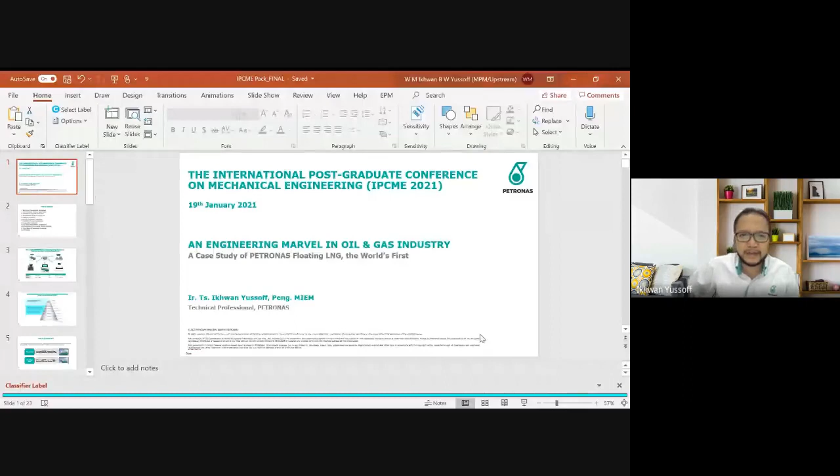Thank you very much, Dr. Hafizi, for a very lengthy introduction. I just would like to check, can you see the slide now?

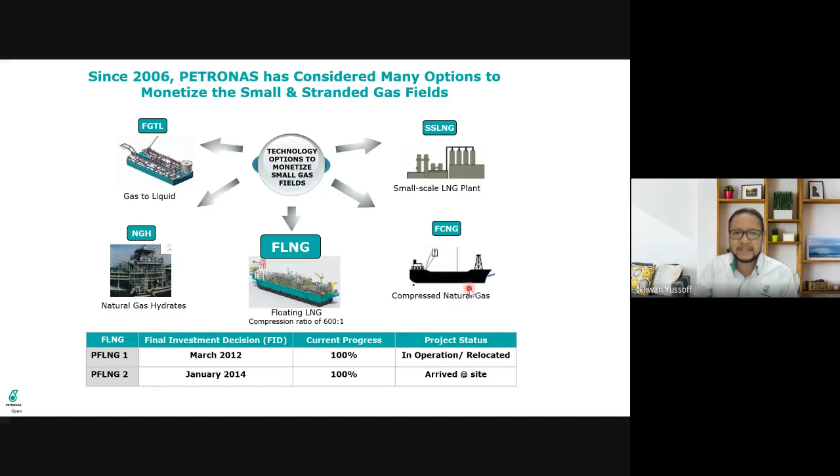From that development option, we have studied various options. For example, we have looked at small-scale LNG plant, floating gas to liquids, natural gas hydrates, as well as floating CNG, compressed natural gas. Don't worry, I will go into more detail later on what is meant by CNG and GTL.

So as a business opportunity in general, we are looking at a certain field size for us to make use of this facility in extracting the reserve underneath the earth, for example, on how we extract the gas out of the earth.

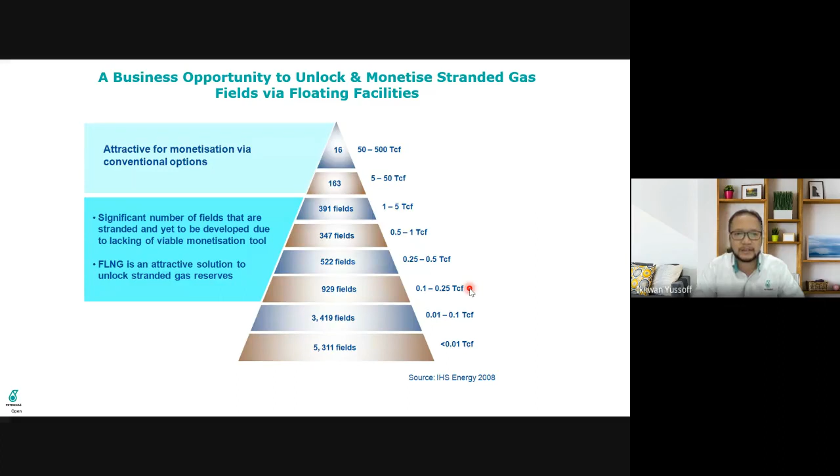Okay, so again, let me define what is stranded. By definition, stranded means the resource which may be too remote or far from the market of natural gas, where construction of pipeline is a bit expensive due to the fact that you have a very bad condition for seabed as well as water depth, which is very deep.

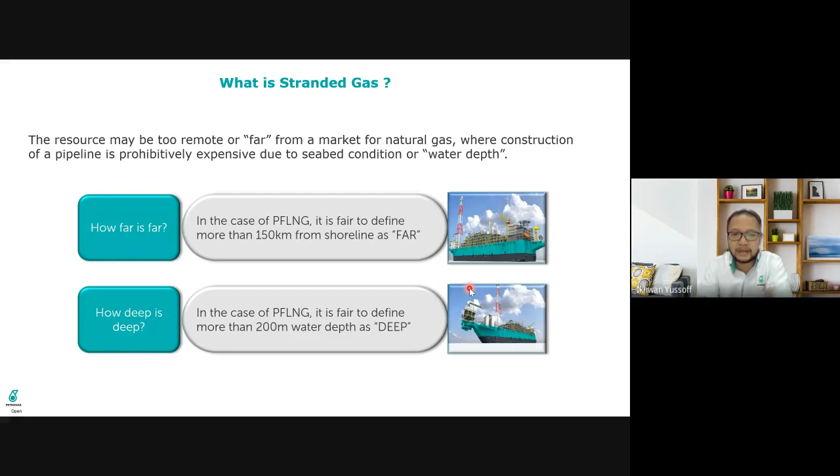So again, how far is far? In the case of PETRONAS floating LNG, PFLNG, I think it is fair to define that it's more than 150 kilometers from shoreline as far. And again, how deep is deep? In our case, the way we define deep is actually more than 200 meters of water depth.

So again, as I promised, what is CNG, GTL, and LNG? Liquefied natural gas is actually stored at approximately minus 160 degrees Celsius. Yeah, it's a sub-zero temperature.

And how is it different from natural gas? So LNG is actually compressed about 600 times of natural gas, GTL is about 1400, while CNG is about 200. So that is the high-level ratio on the definition of the compression of those elements.

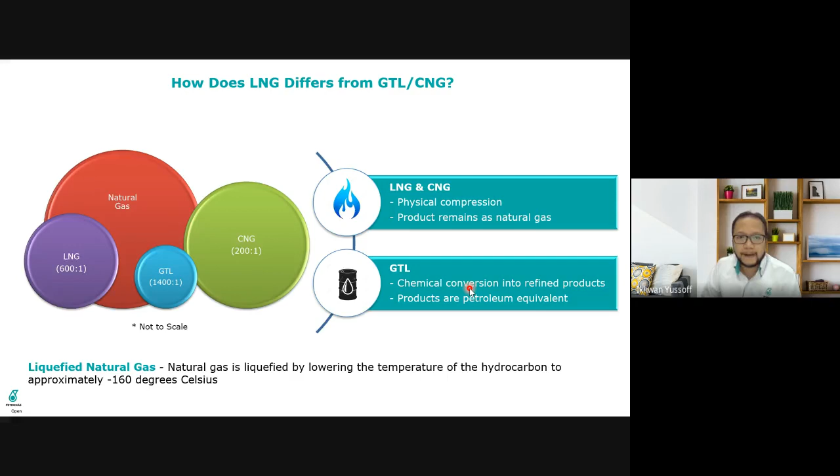So the transportation mode for natural gas - originally this is the way we pipe the natural gas. But again, when we pipe natural gas, it will depend on the distance, how far we want to transport the product. And again, this is a very, very traditional way. It can be either onshore or offshore, and we have some concern when it comes to remote areas.

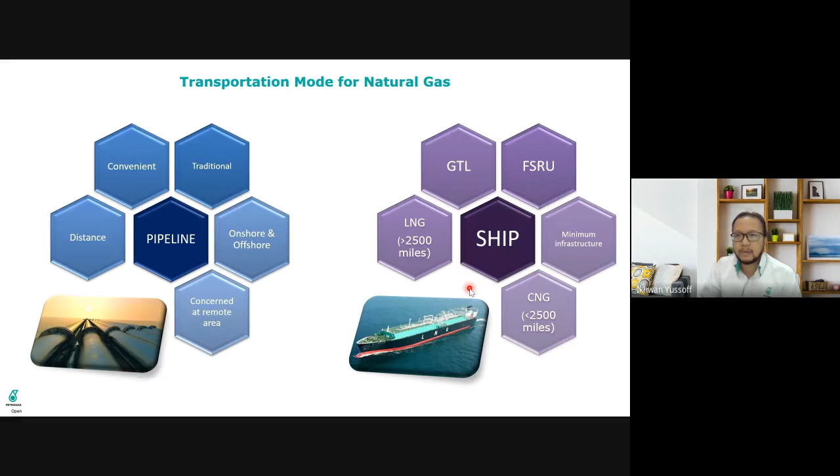So this is why we move from pipeline to ship shape. By having this facility on a ship shape, we will have to design it as relocatable. So as you can see, how do we differentiate between onshore and offshore?

First of all, we look at the dollar and cents, the capex point of view. From capex, we believe that one facility at one single location will basically optimize the cost. From permitting, by having the facility located offshore, it is going to be simpler and easier in terms of the process of obtaining the permitting.

In terms of the installation, for onshore we will have a permanent installation, but we will have a relocatable floating unit if we are building based on a ship shape. In terms of the location, it is going to be very open and easy if we are building offshore.

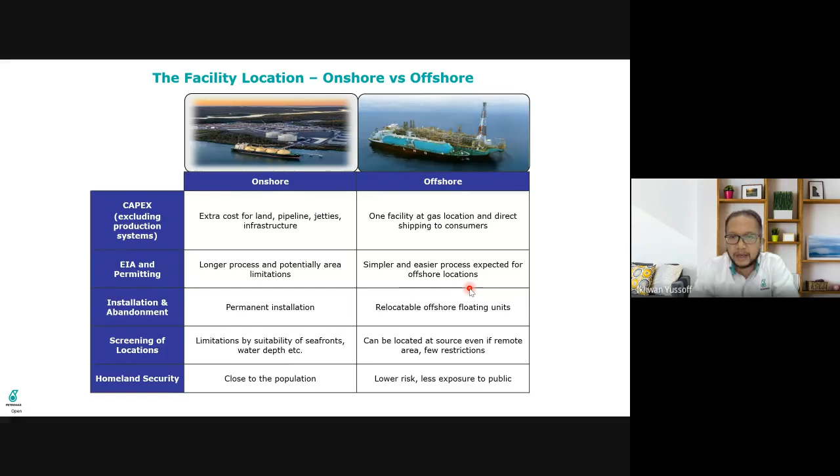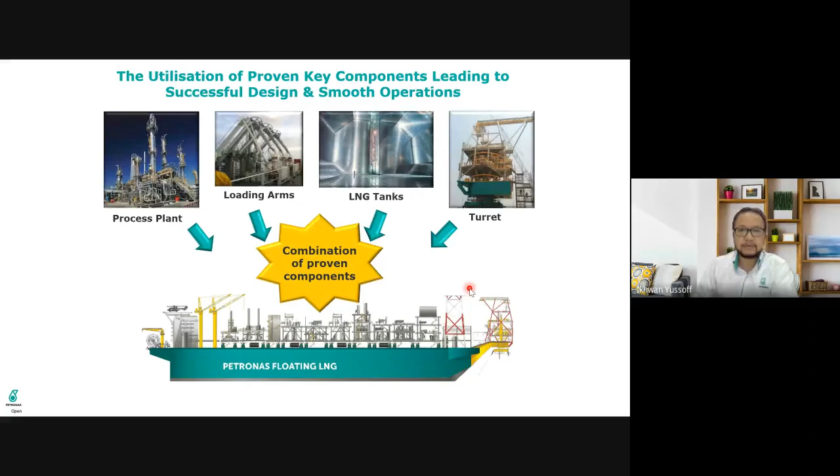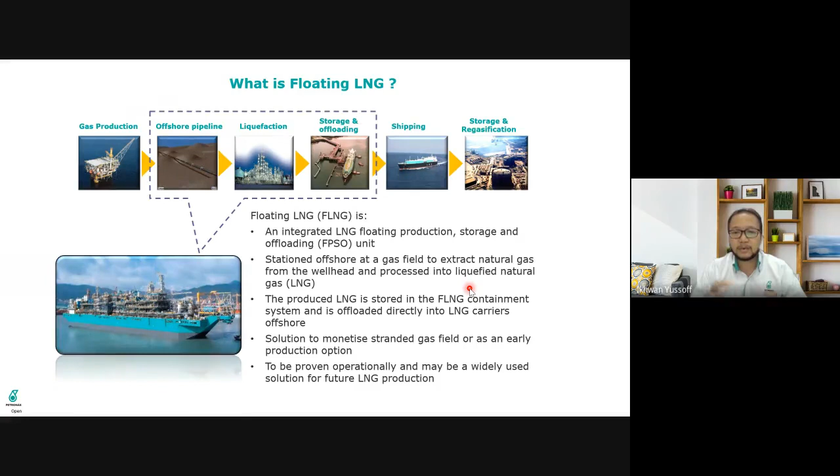But now, with floating LNG, it's going to be an integrated system - a floating production, storage, and offloading in one single unit. This facility will be located somewhere offshore, close to the field, to extract the natural gas. It will also produce the LNG at the same location.

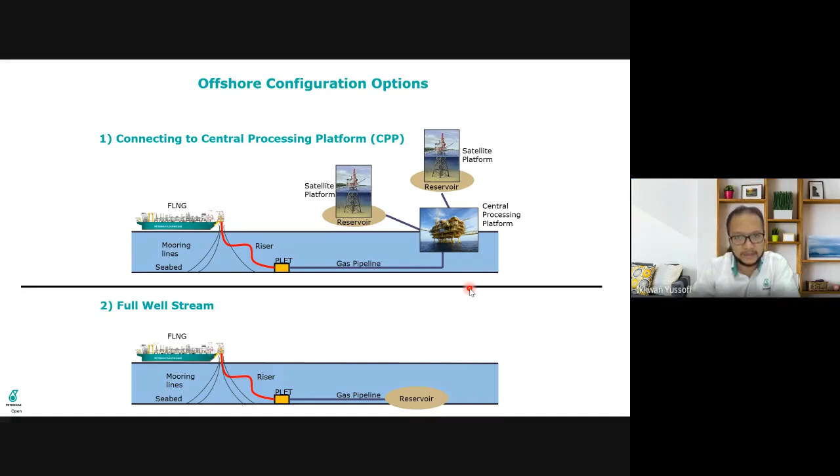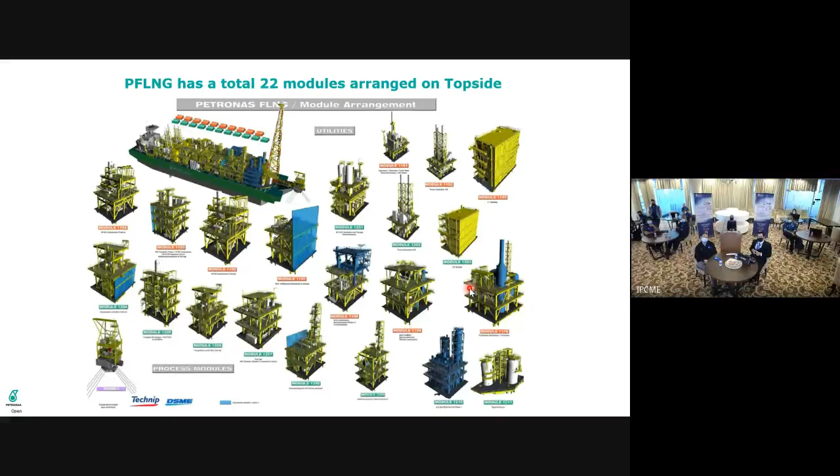So in general, the facility has about 22 modules. I noticed you have a few topics of interest like energy and manufacturing, so I'd say this is very much related to materials and also marine engineering or even structural engineering, because it involves very detailed and thorough study and calculation with regard to weight. The more equipment you put in, the heavier it will be, and the bigger the ship you have to build or design.

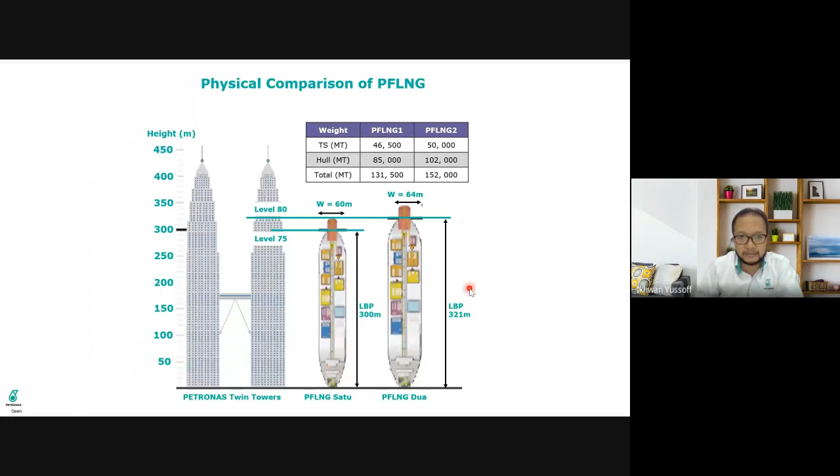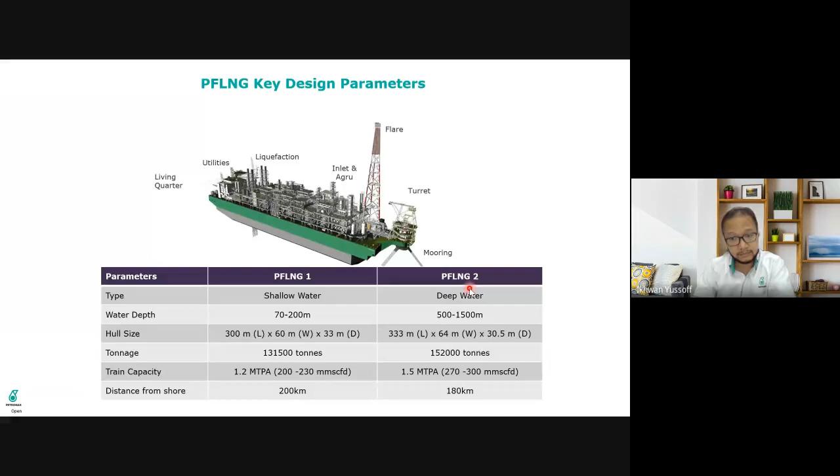So these are the key design parameters. As you can see, the biggest difference is that the first one was designed for shallow water, while the second one was designed for deep water. As I explained earlier, deep water means maybe more than 1,000 meters of water depth to extract natural gas from the well or reservoir. In terms of size, the second one is slightly bigger, as you can see from the increment in tonnage and also the processing facility for how we process the natural gas into the end product. As far as distance to shore is concerned, we are talking about 180 to 200 kilometers.

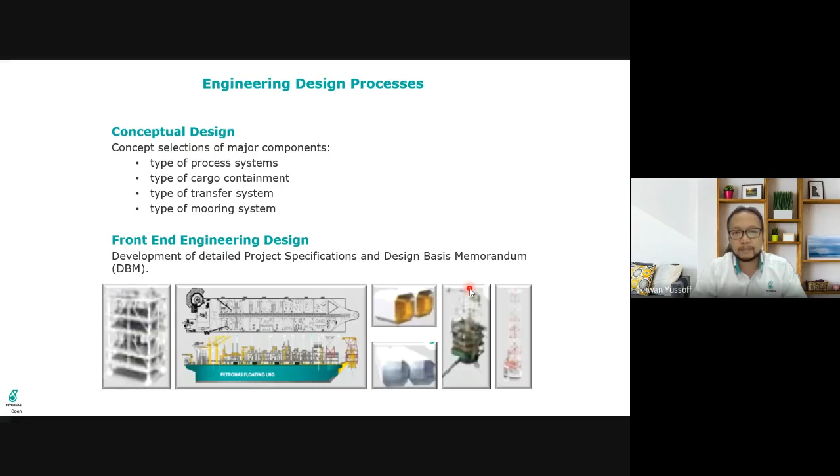And of course, in front-end engineering, where I am located, we were developing the project specification to see how we are going to design the facility. So this is on the construction itself.

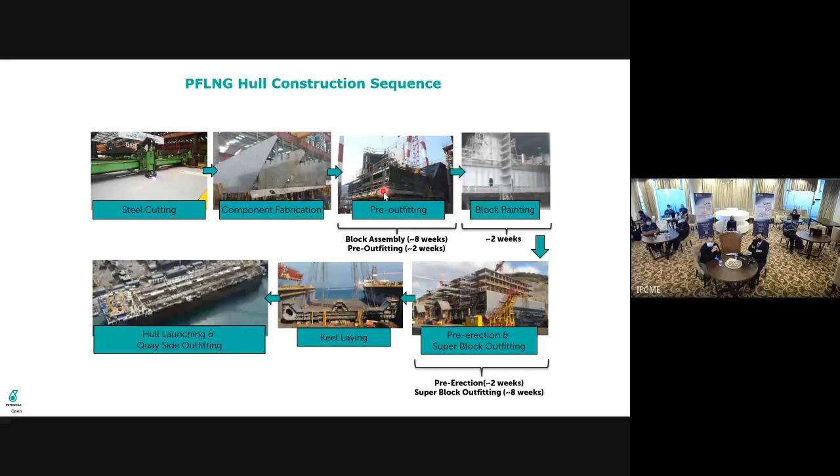So how we started to build the facility. First we started with steel cutting. It's a piece of iron, steel. We cut it and shape it into a component fabrication before pre-outfitting, involving a lot of welding, a lot of people and hours before we go to block painting.

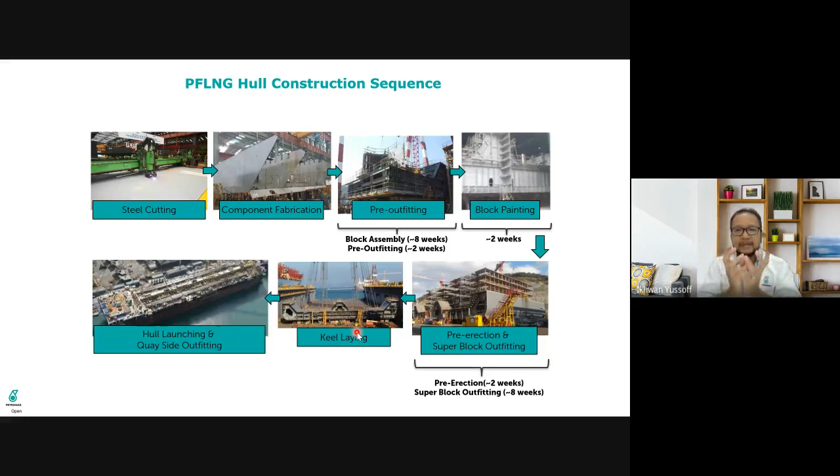So after that, we will go to pre-erection and super block outfitting, and then keel laying. And when we assemble, you just imagine like a Lego. We assemble this like a Lego until we reach and achieve a shape that we desire. So those are on the hull portion.

Now this is on the topside portion. It's all the same. We started with steel cutting, and then we go to assembly, pre-outfitting, painting, then we turn over, outfitting, module outfitting, ready for lifting, meaning all the equipment to process the resources is lifted on board the facility. So you can see the duration of each activity is taking quite some time.

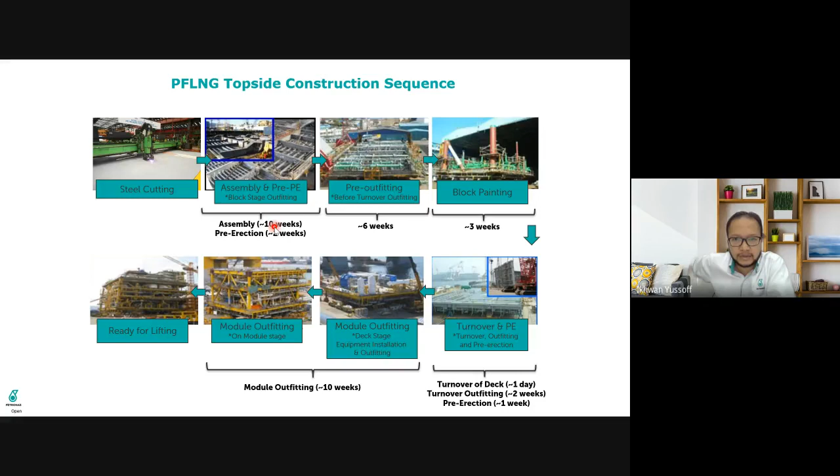For your information, we constructed this in Korea, one of the islands in Korea. Their main function is to build ships, so this is actually their typical activity over there. So what are the key design criteria in developing this floating facility?

Of course, like I mentioned, we cannot run away from safety. Safety is of paramount importance, so we put safety on top of our priority. Production capacity and field development strategy, as I mentioned, we go to shallow water with the design limitation that we have, and we have to design to be more robust if we want to go to deeper water.

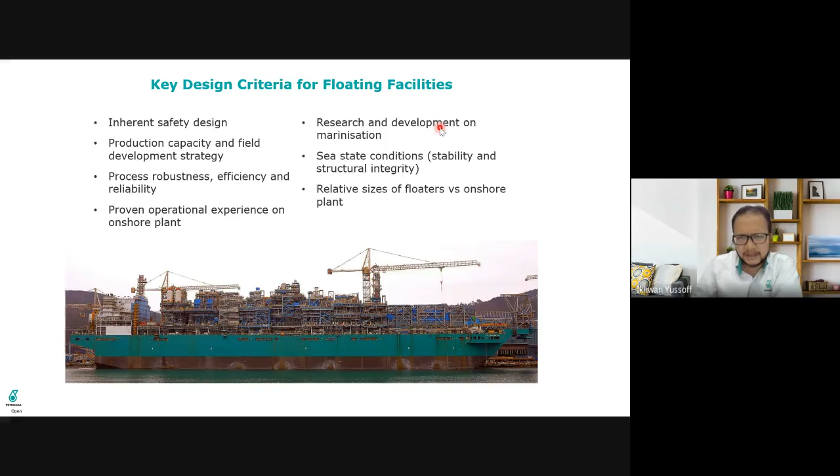So other than that, there is a lot of research and development on marinization, because we are using a lot of equipment to be brought to the offshore environment. So this is the key technology selection that we are talking about.

So we have installed this, called a turret, T-U-R-R-E-T, and the function is to anchor the facility at the site location, because remember, we don't have any structure. It's a floating facility, so we need this to basically anchor our floating system.

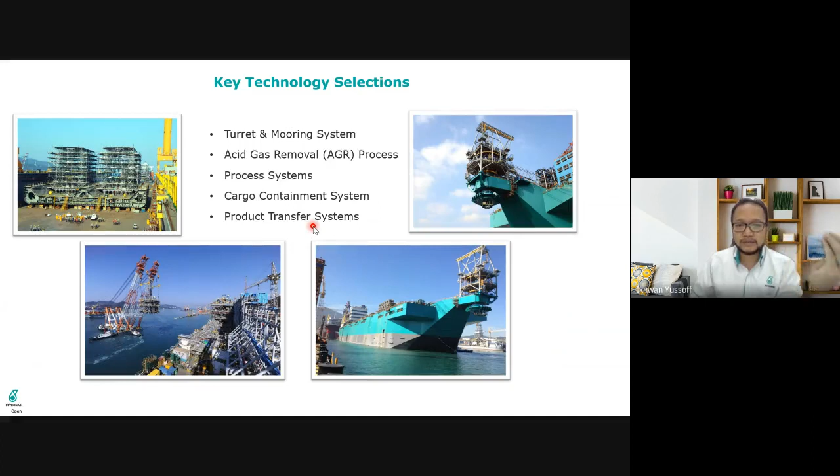And the third one is on the cargo containment system, like I mentioned, the place where we store the product. And last but not least, on how we transfer the product into another facility.

So what are the advantages of this floating facility? First, of course, it's very small and accessible to stranded gas fields. Those fields that are very far away are very difficult for us to build a jacket or platform for. This is where we are going to go.

So what we are saying is it will contribute to a faster overall project schedule as well as having an early production system. And again, more importantly, this is very mobile and relocatable. Just imagine if we are building a platform, we cannot relocate it. But having this as ship shape, we can tow the ship to a new location. If we find a new gas or resources, we will go to the next location.

And last but not least, we also support reducing greenhouse gas emissions by not flaring or venting the gas unnecessarily.

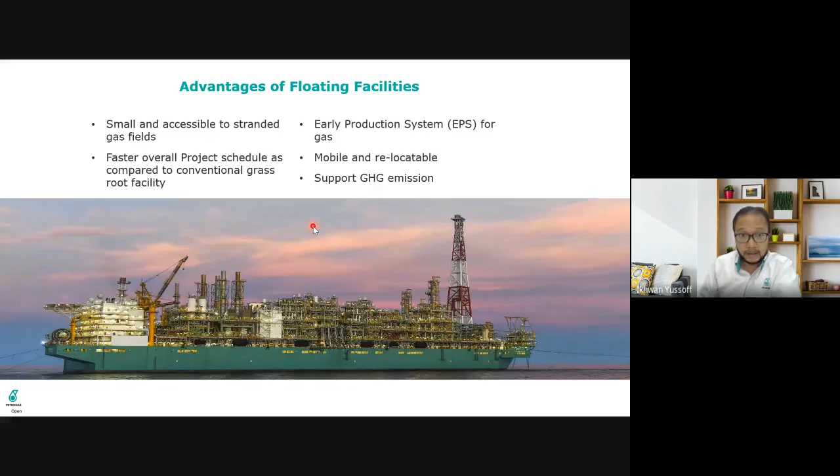So yes, we do face a lot of challenges in building this plant due to the fact that this is first of its kind in the world. We have limited track record, we have no reference, we have no benchmark, but we took a bold decision to build this together under the Malaysian flag. And of course, like I mentioned, the marinization of topside equipment.

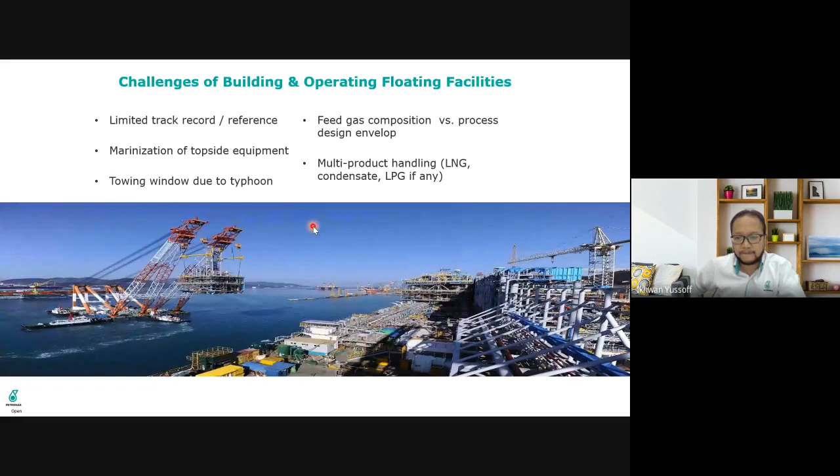Again, due to the fact that we are constructing in Korea, we are subjected to typhoon and cyclone, so we have to plan the project carefully on when to tow back to Malaysia. So as for the conclusion,

we believe floating liquefied natural gas is a breakthrough technology and is an industry game changer. Of course, it requires a bold decision for us to become the pioneer, especially becoming the first company to build and operate this facility. And we believe FLNG signifies technology advancement because we are using a lot of new equipment, new products in this facility.

It will add value to the stranded gas resources. So we are proud to say that PETRONAS will become a reference or benchmark for future projects. And of course, we are taking all aspects of risk into account before we even operate this facility.

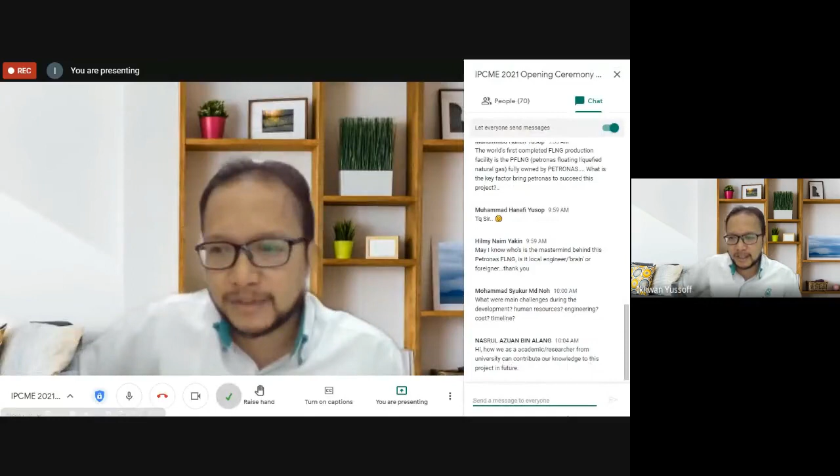Okay, thank you, Prof. If I were to explain this, I'd say back in the days we were basically chasing to be first in the world. Within a split second you can become second, you see? We knew for a fact that our direct competitor, Shell, was also doing something at that time, so everybody was in a very secretive mode, not wanting to reveal their current status.

But one of the biggest lessons learned is to do something within our own capability and capacity. We understood that Shell was building something too big, beyond the capacity of even the shipyard itself. Imagine a car garage at your house, just big enough for a Proton, but you try to bring in an MPV instead.

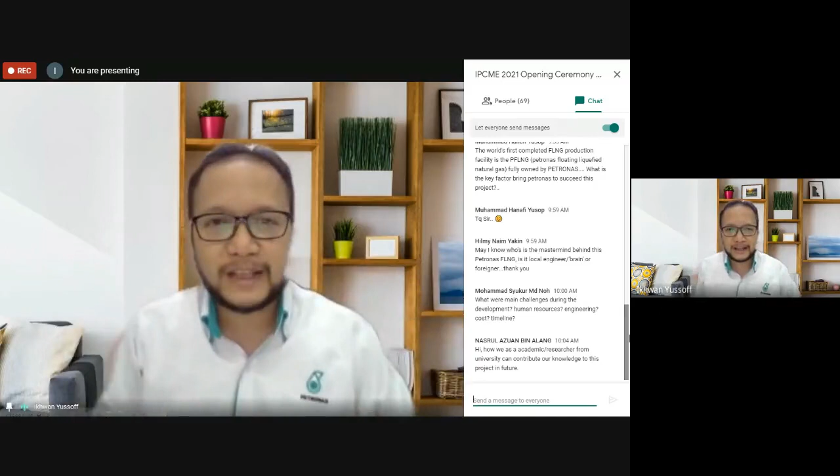This is a similar analogy to the shipyard situation. They were building a very huge floating LNG facility where the shipyard itself couldn't accommodate the length and width required. So what we did at PETRONAS was play around with a comfortable size of ship for the shipyard to build. That's the recipe for success. To go big, to be famous, sometimes you need to stay medium-term rather than going for the wow factor immediately.

So imagine now, Shell only has one unit and they're still struggling to operate it, while we at PETRONAS, building at a smaller scale, already have two units. Right, okay, thank you.

All right, Prof, so we have another question from Dr. Nasrul: how can we, as academic researchers from university, contribute to this project in the future?

As far as industry is concerned, yes, we are very much open. We look forward to new suggestions. For example, we deal with very heavy equipment, so maybe mechanical students could contribute significantly by designing equipment that is lighter while maintaining similar or more efficient function. That's something I can think of.

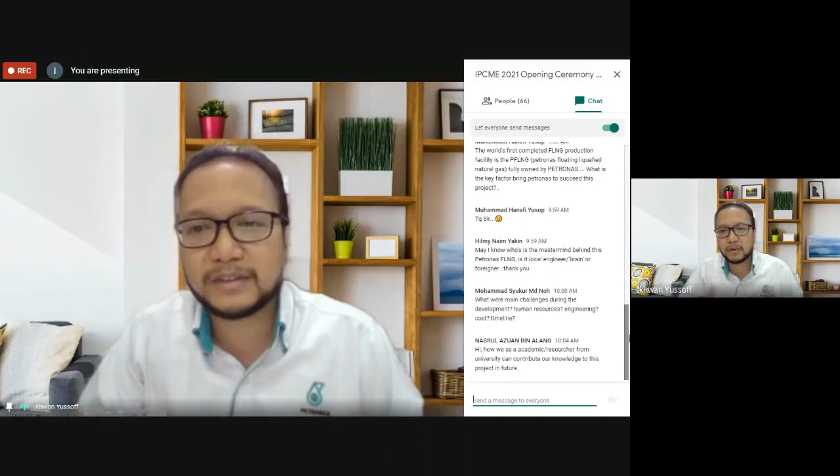And maybe from process engineering, how do we design something safer and more friendly to the environment, releasing less hydrocarbon and less carbon. This is something you may contribute to in the future, because I believe every country is heading towards a greener future.

All right, thank you very much. I think do you have any other questions in the room?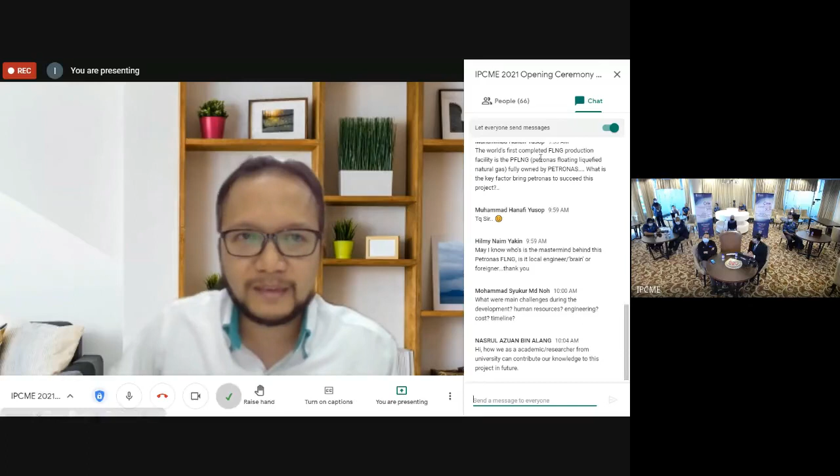Sorry Dr. Mahadzir, just one technical question. I want to ask about the specification. There are two types of operation: one is direct extraction of oil from the seabed, and the other is from an existing platform. What are the conditions and restrictions of this operation, in terms of weather, wave type, and related factors? How does this system accommodate this situation? Thank you.

Very interesting question, this is my favorite. We've done tremendous study in marine engineering on how to withstand the weather, especially when operating in Sabah and Sarawak, which is prone to monsoon, if not typhoon or cyclone. We collected up to 20 years of Met Ocean data, which shows the trend of the highest wave height, HS. So the limitation is always there. For example, during product transfer between the facility and product tanker, the berthing envelope limitation is only 2.5 meters of wave height. We went through the meteorological database and found that 90% of the year we'd be operating within 2.5 meters of wave height, so we designed the facility to withstand that number. But in normal operational conditions, not including transfer, we are good to operate at 4 to 5 meter wave height.

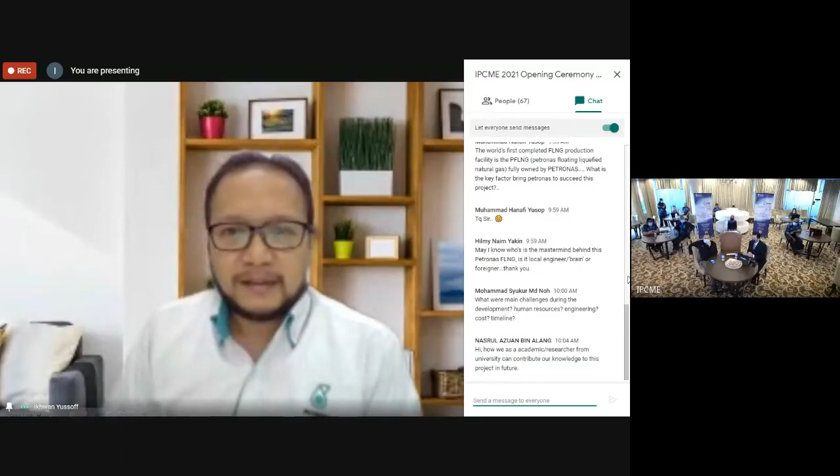We're still open for questions. If there are no questions, I believe this is the end of our session. First, I would like to thank Ikhwan for the opportunity to come to our conference and give a nice speech, sharing a lot of interesting knowledge with us, and for the audience's involvement in asking questions. I'd also like to thank everyone, and the dean. I think that's it for now. I'll leave it to the chairperson for the closing.